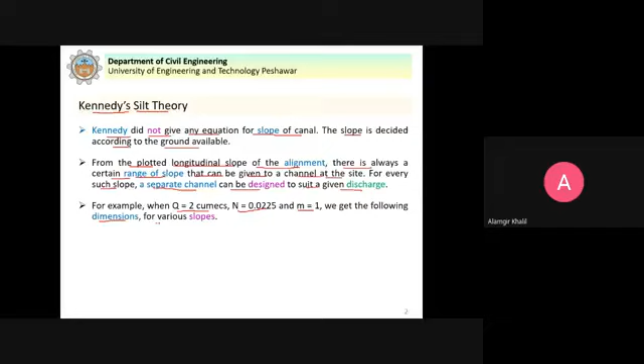For example, if we consider a discharge of 2 cubic meters per second, with this rugosity coefficient and this critical velocity ratio, we get different dimensions for various slopes. You can see in this table, if we design the channel according to Kennedy's theory, assuming the slope is 1 in 5,000, we get these values for the bottom width of the channel and the depth of flow. We have this as the trapezoidal channel.

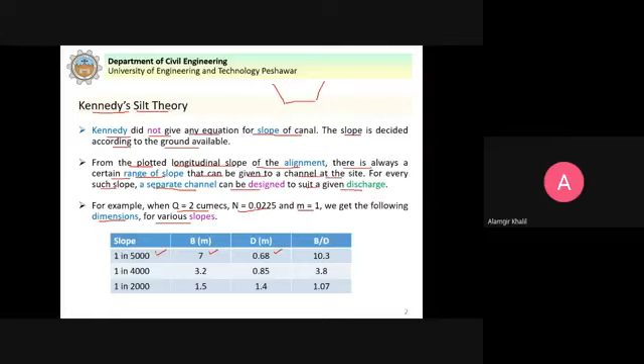So this is the bottom width, this is B, and this is the depth of flow, the full supply depth. So the B by D ratio is 10.3.

If we consider the slope as 1 in 4,000, then these are the values. You can see here that for every such slope, a separate channel can be designed for a given discharge. The discharge is the same, 2 cubic meters per second, and you can see we get these dimensions, so the B by D ratio is then 3.8.

And if we consider the longitudinal slope as 1 in 2000, then the bottom width is 1.5 and the depth of flow is 1.4, giving a B by D ratio of 1.07. So it means that when we consider a different longitudinal slope, we get different dimensions for the channel cross section for that given discharge.

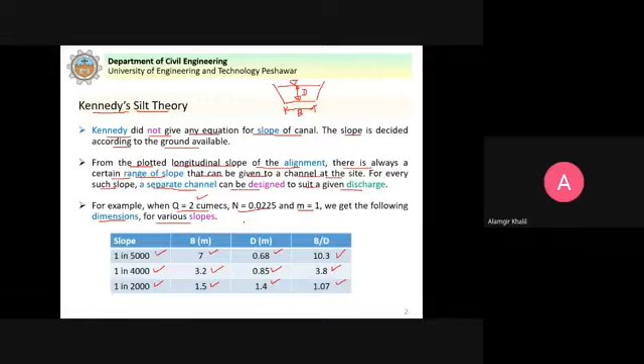Now the question is, which channel section will best suit the given situation? This is one of the drawbacks in Kennedy's silt theory, because Kennedy did not give any clue as to which one would be the best. Unfortunately, Kennedy's theory provides no clue to which of the channels will be best suited for a particular discharge and type of soil. Hence, some guidance is necessary to find out which channel would suit the need best.

To provide this guidance, suitable B by D ratios were fixed in various irrigation departments on the basis of experience. So to provide guidance on which channel section would be best for the given situation, for the given discharge and type of soil, suitable B by D ratios were fixed from experience.

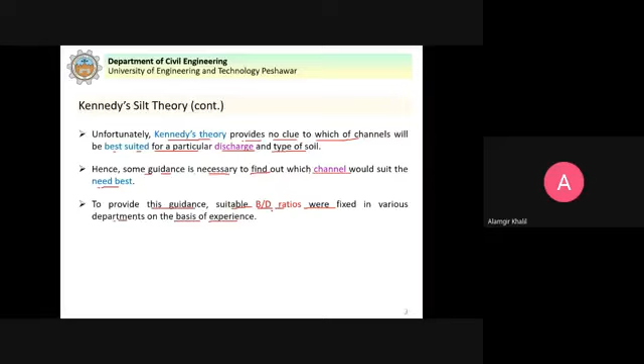Wood's normal design table, available in the book Irrigation and Water Power Engineering by Punmia, is one such criteria which was prepared in Punjab and is very much in use. Thus, if the B by D ratio is selected from the recommended values, one more equation is available, and a unique design of a channel can be done, including bed slope, using Kennedy's theory.

So what happened is, if you remember in the previous lecture, we solved a problem. If you change the slope, we get different dimensions of the channel section, so the solution is not unique.

If we fix this B by D ratio, we can have a unique design, meaning there will be one design of the channel. We will come up with the depth and the bottom width of the trapezoidal channel, including the bed slope, the longitudinal slope of the channel, using Kennedy's theory.

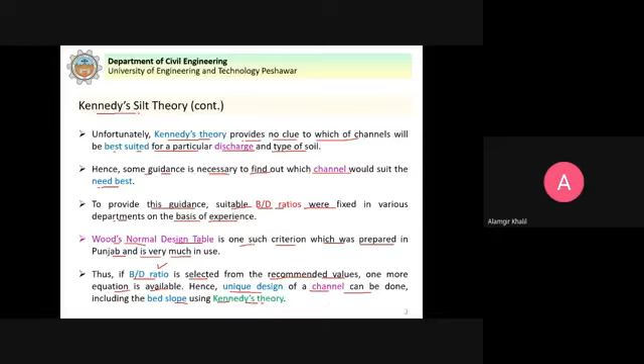This was an improvement on Kennedy's silt theory, so that's why we discuss case 2. Now for case 2, the discharge, rugosity coefficient, the critical velocity ratio, and B by D ratio are given.

So how do we proceed to design the channel? Again, we have a step-by-step procedure. Step number 1 is to calculate A in terms of D. Since the B by D ratio is given, let B by D equal X, where X is some given value. So B will be equal to D times X.

Now this is the area for a trapezoidal channel section. A is equal to B times D plus Z, where Z is the slope, into D square. Now if we consider the side slope is half to 1, this is Z here, as we already discussed.

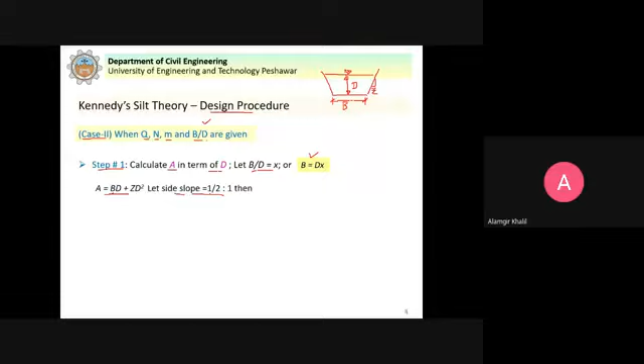So this is the depth, the full supply depth for the design discharge, and this is the bottom width of the channel section, and we have the side slope, so this is Z. Let the side slope be equal to half ratio 1.

Then this equation can be written as for area. Now we replace this B in this equation for area. So this will then be equal to D square into X plus 0.5.

Step number 2: the value of V is known in terms of D by Kennedy's equation. So this is the equation, this is the critical velocity that we calculate from Kennedy's equation. You can see here that in this equation, the values of V and A

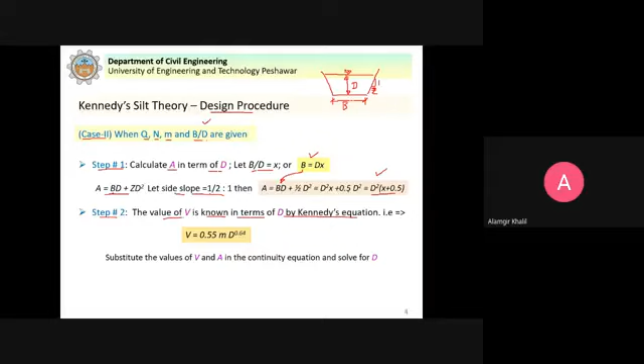should be substituted in the continuity equation. We have this as the area, and we have this as the velocity, for the equation that we can put in the continuity equation: Q is equal to A into V. So A is coming from here and V is coming from here. When you simplify this equation, you can see that the only unknown is D.

Because discharge is given, the critical velocity ratio is given, X is given, this is the B by D ratio. So the only unknown is the depth of the flow section, so that can be determined.

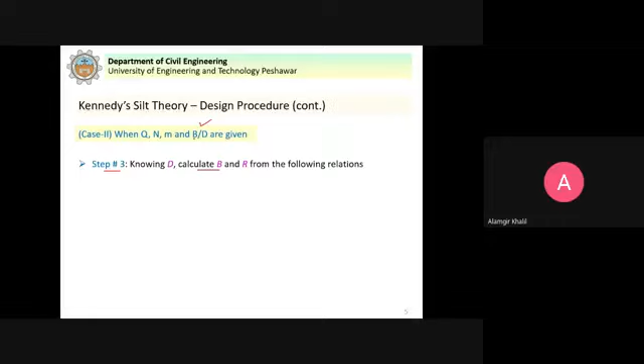Now, when depth can be determined, step number 3 is we can calculate B, because the B by D ratio is given and depth is now known, we can calculate the bottom width. Once B and D are known, we can calculate the hydraulic radius or hydraulic mean depth.

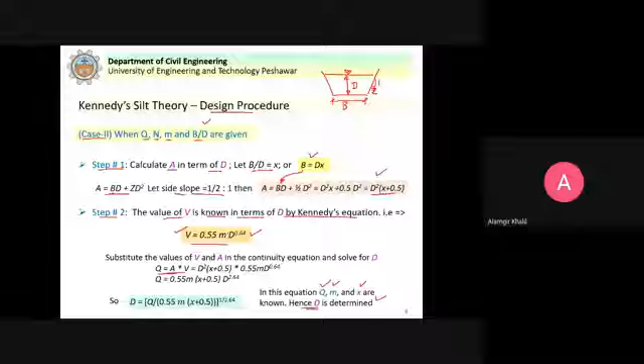Step number 4 is that in Kennedy's equation, the critical velocity can be calculated, now that depth is known, so we can calculate the velocity from Kennedy's equation, using the critical velocity ratio M that is given. Clear?

Now step number 5 is that knowing velocity and the hydraulic radius, we can determine the longitudinal slope of the channel using the Chezy and Kutter equations. So this is the Chezy equation: V is equal to C into square root of hydraulic radius and longitudinal slope.

So this is the Kutter equation. This value of C comes from the Kutter equation, and we have square root of RS in the MKS system. In the FPS system, the equation we already discussed in the previous lecture.

So in this equation, everything is known: this velocity is known, the rugosity coefficient is given, and the hydraulic radius we have calculated. So the only unknown is the longitudinal slope, this S. Now this S is present in both the numerator and the denominator, so this equation can be solved by trial and error.

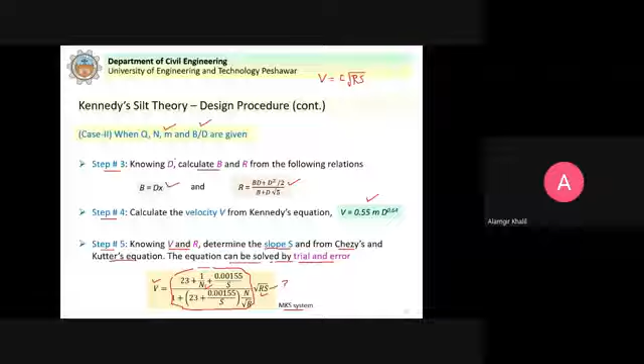So these are the design steps that we have to follow in case 2. Now let us try to solve an example.

Design an irrigation canal with the following data by Kennedy's theory: the discharge is 14 cubic meter per second, the rugosity coefficient is 0.0225, the critical velocity ratio is 1, and the B by D ratio given is 5.7. Let us try to follow these steps and solve this problem.

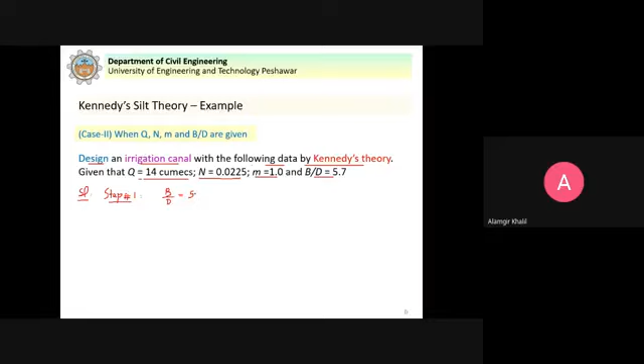So step number 1, following our step-by-step procedure, we have to write down the equation for the area. The channel we consider is the trapezoidal channel section. As the B by D ratio is given, that is 5.7, this can be written as B equal 5.7 times D.

Now we have the equation for the area A. This is the general formula for a trapezoidal channel section: B times D plus Z, which is the side slope, into D square.

Now for side slope, Z ratio 1, we consider half to 1. Then this equation for area A becomes B into D plus D square by 2.

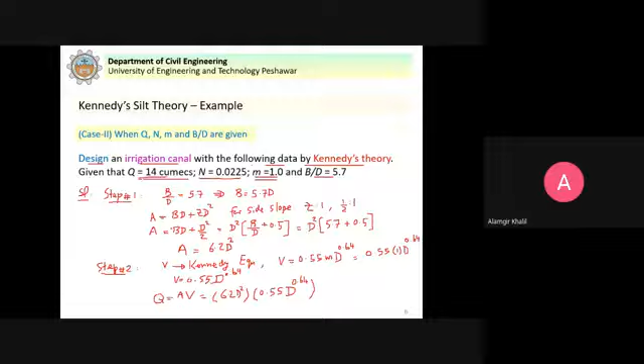Now in this equation you see discharge is given as 14 cumecs, so the only unknown is D. So D we can calculate from here. D, this will be equal to the discharge divided by 6.2 into 0.55, and power here we have 2 and 0.64, so 2.64 comes on the other side. So this will be 1 divided by 2.64.

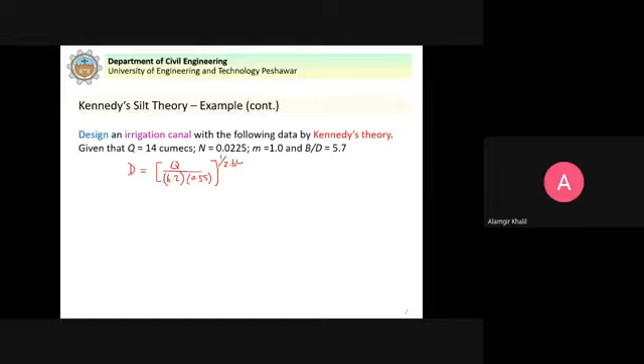So now just plug in the values. So we will get D that is equal to 1.71 meter. Once D is known, then we can go to step number 3.

And now B by D ratio is given, we can calculate B. So this is 5.7. So this will be equal to 5.7 into D. Now just put the value of D as 1.71, so this comes out to be 9.75 meter.

Similarly, we can calculate the hydraulic radius. So the hydraulic radius, that is equal to flow area divided by the wetted perimeter. So this will be equal to B times D plus D square by 2 for the given side slopes, and the wetted perimeter will be equal to the bottom width plus D into square root of 5. So if you plug in the values for B and D, we will get this is 1.34 meter.

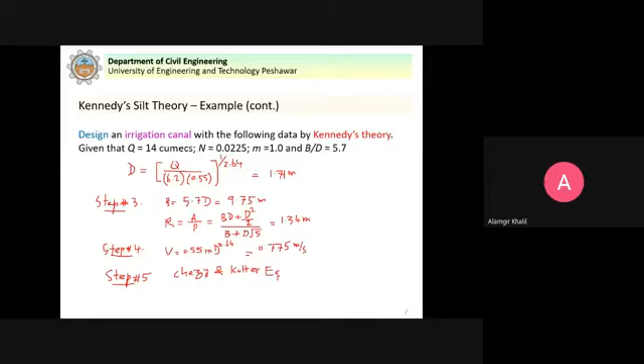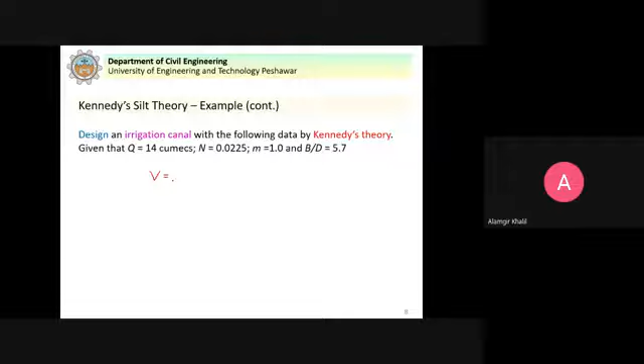Chezy and Kutter equations. So that equation is that V is equal to, take care of the system of units, 23 plus 1 divided by n, rugosity coefficient, plus we have 0.00155 divided by S, all divided by 1 plus 23 plus 0.00155 divided by S, into n, rugosity coefficient, into square root of R, and this whole multiplied by square root of RS.

Now in this equation you can see that we have S here, we have S here, the longitudinal slope, and we have S here. So V is known, everything is known, hydraulic radius is calculated, rugosity coefficient is given here, you can see. So the only unknown is S. Now S is present in the numerator and in the denominator, so solving by trial and error.

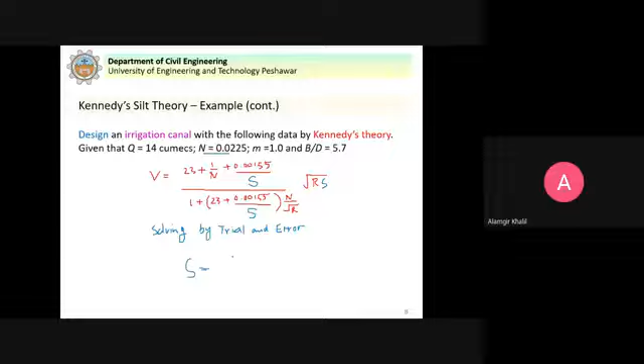Solving by trial and error, so we will get the value for this slope of the channel equal to 1 in 4940.

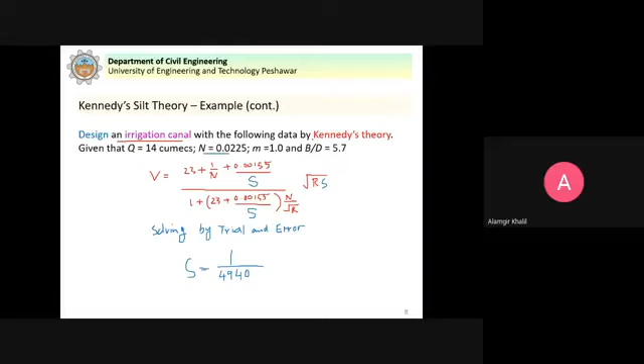So this is how we proceed to design the irrigation canal using the Kennedy's theory when B by D ratio is given. So you can see here the advantage of this B by D ratio, that we have unique design, and also you see that we get the value for the longitudinal slope of the channel. Clear?

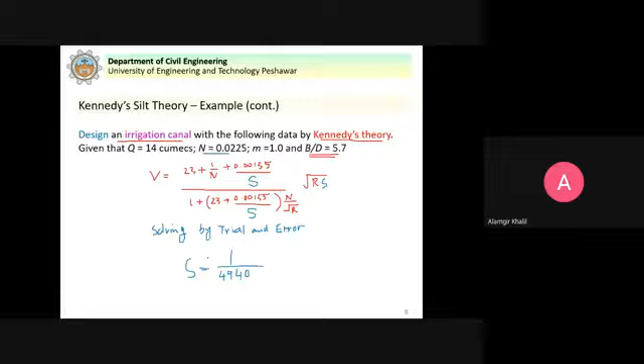Next we discuss drawbacks in Kennedy's theory. Kennedy did not realize the importance of B by D ratio, as we already discussed in detail. Similarly, he did not define the silt grade, the size, and the silt charge, the quantity of silt load. He did not give any relation between velocity of flow and water surface slope.

Empirical relations between velocity, depth, hydraulic radius, and slopes were found to determine a stable cross section.

So what is the drawback of empirical relations? You develop empirical equations from a set of data, and these equations fit only that data. It means that under other conditions, these equations may not be applicable or may not give satisfactory results. So this is normally the problem with empirical equations, that their application is limited to similar cases only, not all cases.

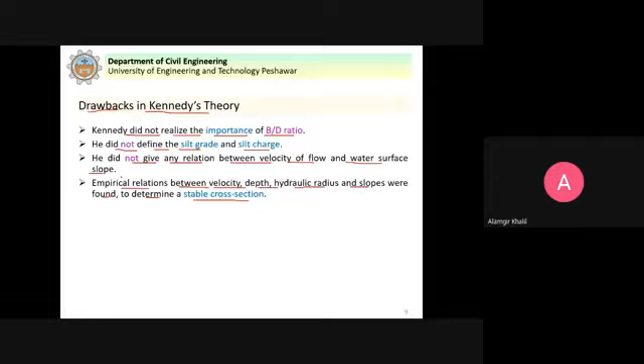Kennedy did not give any relation for the calculation of bed slope of the canal. The bed slope could be adopted as per the ground conditions. Similarly, he did not account for silt concentration and bed load separately; he accounted for all factors in one single factor, that is M, the critical velocity ratio.

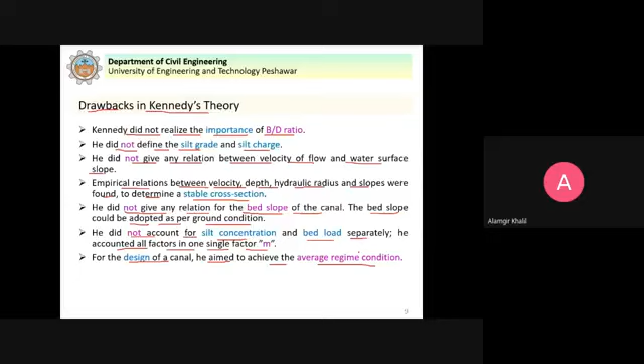For the design of a canal, he aimed to achieve the average regime conditions, and for the determination of mean velocity of flow, he used Kutter's equation. Thus, the limitations of Kutter's equation were incorporated in his theory also. So these are the drawbacks in Kennedy's theory.

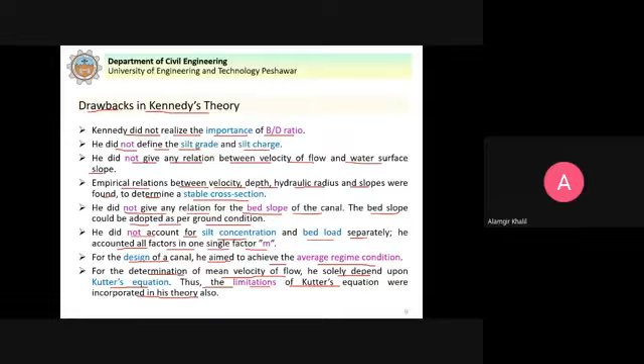So next we discuss Lacey's regime theory. Lacey, an eminent civil engineer of the United Provinces Irrigation Department, published his first paper through the Institution of Civil Engineers, London, in 1929. He carried out extensive investigations on the design of stable channels in alluvium, and on the basis of his research work, he found many drawbacks in Kennedy's theory.

It was stated by Kennedy that a channel is said to be in the state of regime, that is a stable channel, if there is neither silting nor scouring in the channel. If there is no silting and no scouring, the channel is stable, and that is the state of regime. But according to Lacey, even though a channel with no silting and no scouring may actually not be in regime.

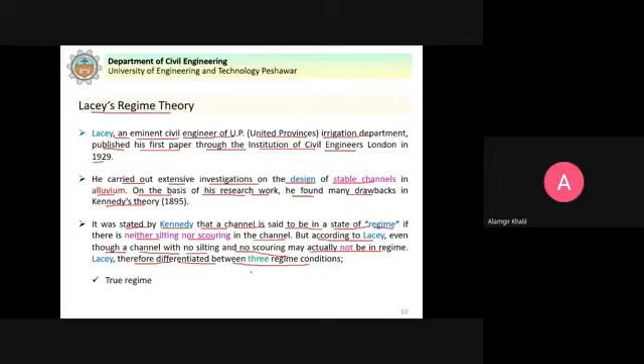So Lacey therefore differentiated between three regime conditions: true regime, initial regime, and final regime. So what are regime conditions? A channel is said to be in regime when the following conditions are satisfied.

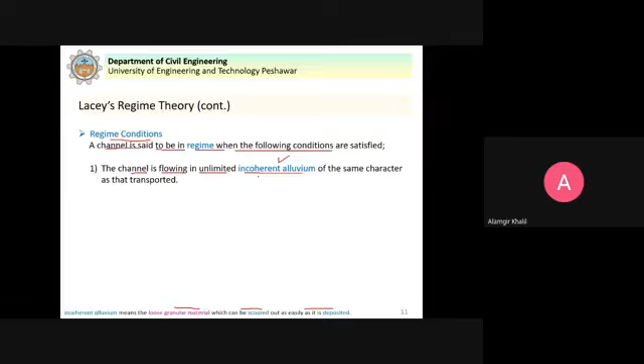Number one, the channel is flowing in an unlimited incoherent alluvium. So what is meant by incoherent alluvium? It is a loose granular material which can be scoured out as easily as it is deposited. That is known as incoherent alluvium. So the channel is flowing - this is a requirement for the regime condition - that the channel is flowing in unlimited incoherent alluvium of the same character as that transported.

Discharge is constant, silt charge is constant, that is the amount of silt is constant, silt grade is constant, that is the size, and the flow is uniform flow. Hence, a designed channel is said to be in true regime if the above conditions are satisfied. So if these conditions are satisfied, then we say that the design channel is in true regime.

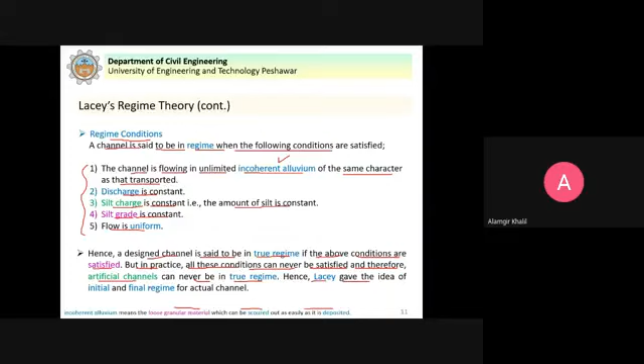But in practice, all these conditions can never be satisfied, and therefore artificial channels that we design can never be in true regime. Hence, Lacey gave the idea of initial and final regime for actual channels.

So what is initial regime? One of the conditions of attaining regime of a channel is that there should be freedom for the channel to form its own section. Initial regime is the state of a channel that has formed its cross section only and yet not secured the longitudinal slope.

This is initial regime. So what do we mean by initial regime? The bed slope of the channel varies - it has yet not secured the longitudinal slope. If a channel is constructed with a defective slope, what will happen? Naturally, given the channel and flow conditions, it will try to establish a longitudinal slope that is appropriate, because this is an unlined channel.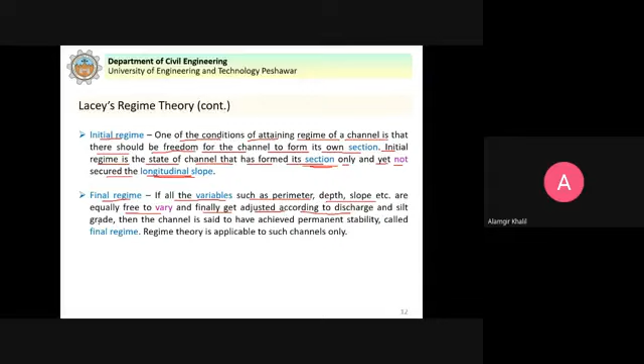The final regime: if all the variables such as perimeter, depth, slope, etc. are equally free to vary and finally get adjusted according to discharge and silt grade, then the channel is said to have achieved permanent stability, called final regime. This is the final regime - if all the variables are equally free to vary and achieve permanent stability, this is known as final regime. Regime theory is applicable to such channels only.

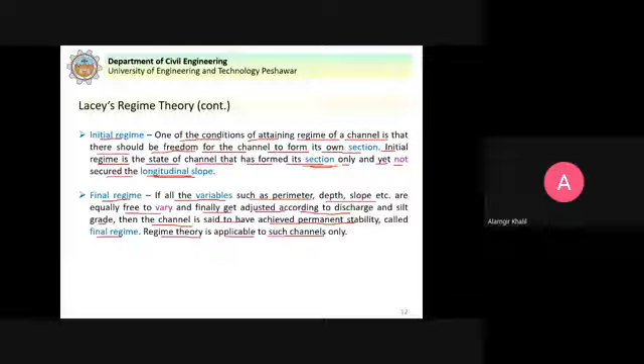We continue with this discussion. Such a channel in which all variables are equally free to vary has a tendency to assume a semi-elliptical section. This is according to this theory, this is what this theory says.

So you can see here the channel shape carrying coarse silt. It will have shallow depth and wide section. You can see here the section is wide and the depth is shallow. This is the channel shape carrying coarse silt.

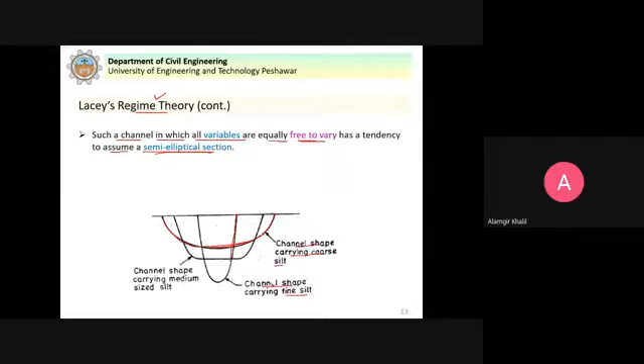If the channel carries fine silt, this will be the channel shape. It will be narrower in width and it will be deeper, narrower width and more depth. This is how the channel will assume these shapes, according to this theory.

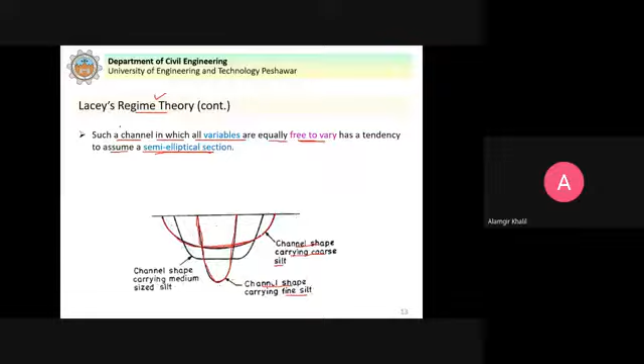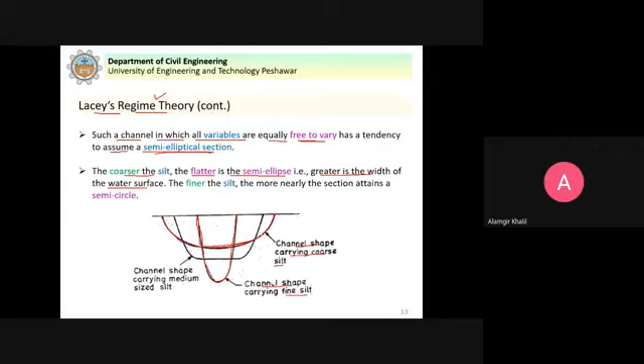So the coarser the silt, the flatter is the semi-ellipse, that is, greater is the width of the water surface. As I already explained, the finer the silt, the more nearly the section attains a semicircle.

The second point which Lacey argued was that the sediment is kept in suspension not only by the vertical component of the eddies which are generated on the channel bed, but also by the eddies generated on the sides of the channel.

If you remember, we discussed in Kennedy's theory that water is flowing in an unlined channel, so because the water is flowing there will be friction, and because of the friction these eddies are generated. Kennedy argued that the eddies generated from the bed of the channel, for most part, keep the sediments, the silt, in suspension, and do not allow silting to happen in the channel.

He stated that we can have eddies from the sides of the channel, but for most part they are horizontal and have very little effect on the silt in suspension.

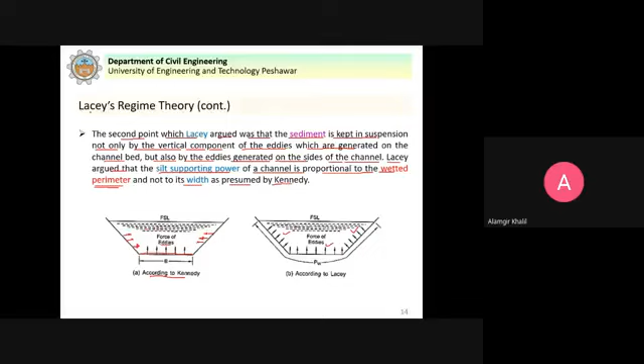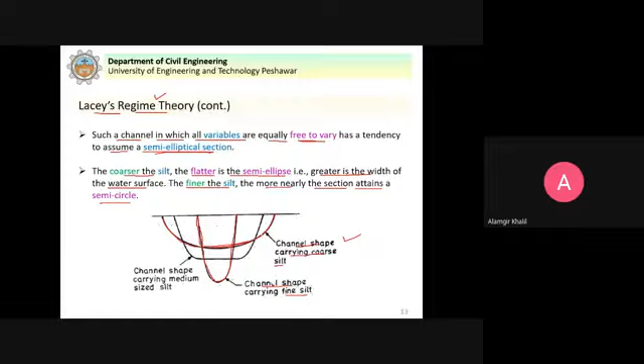However, Lacey argued that the silt supporting power of the channel is proportional to the wetted perimeter and not to its width as presumed by Kennedy. As per the Lacey regime theory, this makes sense. You see here that this is the shape of the channel for coarse silt, and this is the shape of the channel for fine silt. You can see here that the wetted perimeter varies, so this makes sense with what he said.

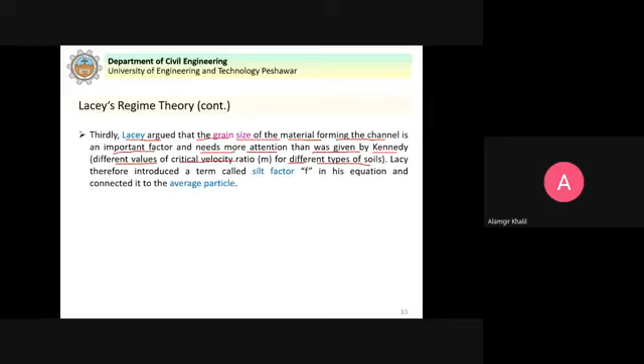Thirdly, Lacey argued that the grain size of the material forming the channel is an important factor and needs more attention than was given by Kennedy, because he brings everything into the critical velocity ratio, with different values of critical velocity ratio for different types of soils. So Lacey therefore introduced a term known as the silt factor in his equation and connected it to the average particle size, and he defined this silt factor.

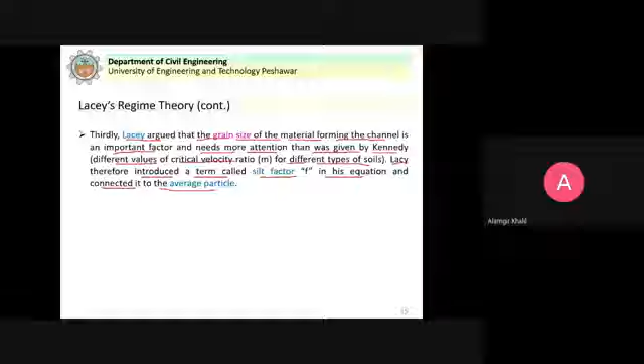Now, permanent regime: a channel is in permanent regime when its section is provided with a lining to protect against scouring action, thereby imparting permanency to the channel section and longitudinal slope.

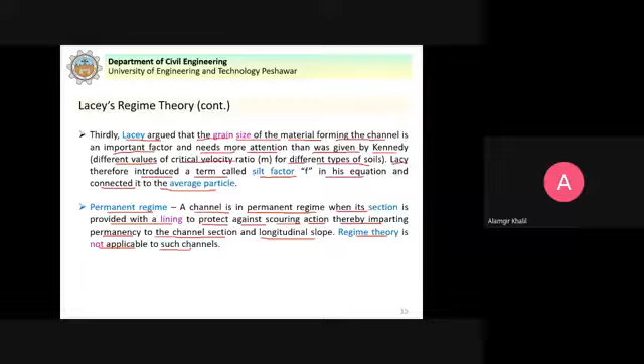So regime theory is not applicable to such channels. That's why the Kennedy and the Lacey theory are not applied to the design of lined canals; these are for the design of unlined canals.

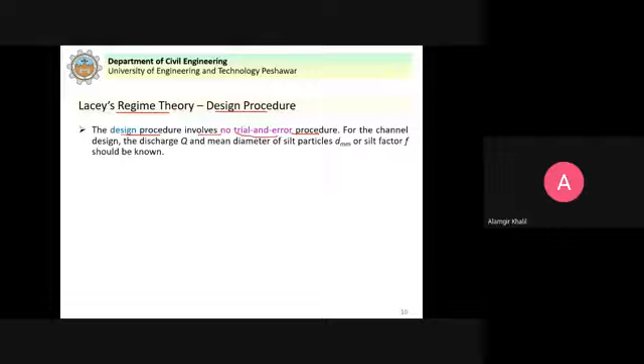So the design procedure for Lacey's regime theory involves no trial and error. For the channel design, the discharge and the mean diameter of the silt particles, d sub mm, in millimeters, or the silt factor should be known.

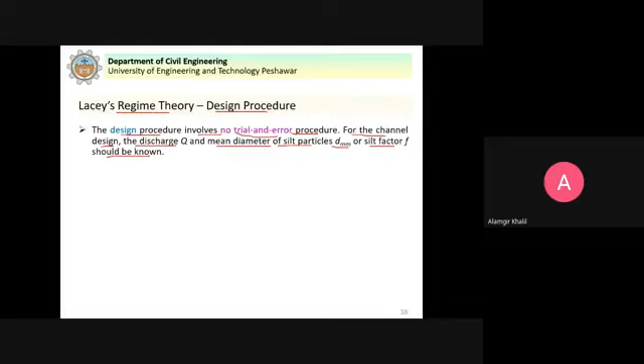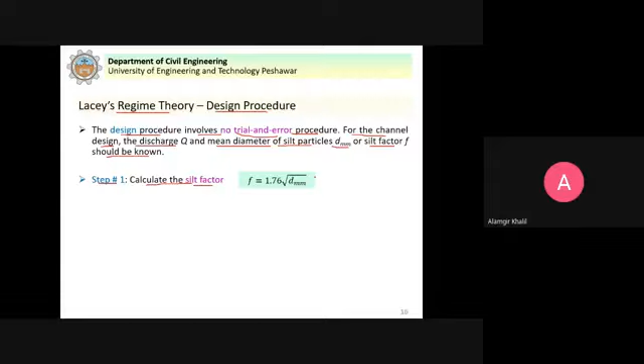So step number 1 is to calculate the silt factor. Kennedy defined the critical velocity ratio, but in case of Lacey's theory, he gave the silt factor using this equation, where either the silt factor is directly given or it can be calculated using this equation, where d mm is the mean particle size in millimeters.

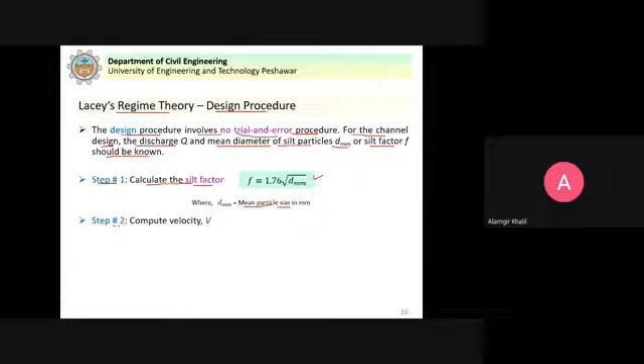Step number 5 is to find out the bed width and the depth d of the channel section. Since area and wetted perimeter are known, the side slope of the canal can be considered as usually half to 1.

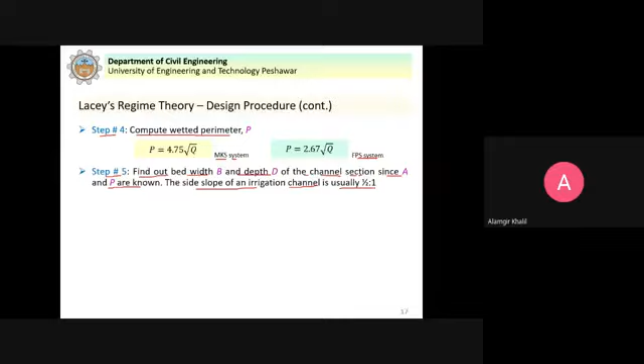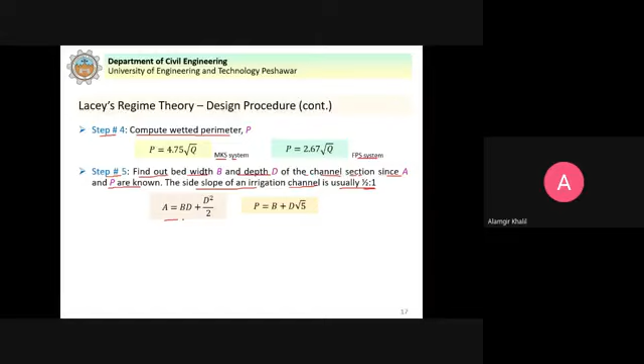So we have these equations for a trapezoidal channel. If the side slopes are half to 1, these are now the equations. In this equation you can see the wetted perimeter is known and the area is known.

So we have unknowns as B, the bottom width, and the depth. We have two equations, and these two equations can be solved in terms of the two unknowns.

We can use these equations to calculate the values. D will be equal to this, using area A, and for B, when D is known, it can be calculated using this equation. This is actually a simplification of this equation. Square root of 5 is 2.236.

Step number 6 is to calculate the hydraulic radius. Again, Lacey gives the equation. For the hydraulic radius, this equation applies in the MKS system and this one in the FPS system.

We calculate hydraulic radius from here. Now, hydraulic radius can also be calculated as area divided by the wetted perimeter, and since the area and wetted perimeter are already calculated, R can also be calculated from this equation: area divided by the wetted perimeter.

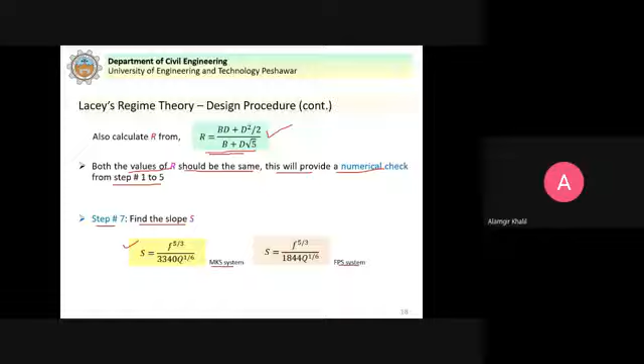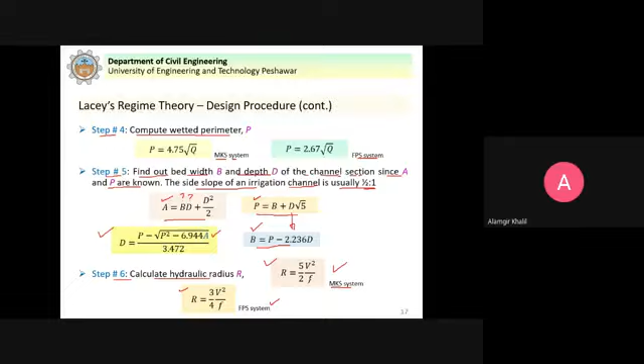Now these equations for the slope involve the silt factor. The hydraulic radius equation involves the velocity and the silt factor. Similarly, the wetted perimeter equation, and we have the velocity equation here, involve the discharge and the silt factor.

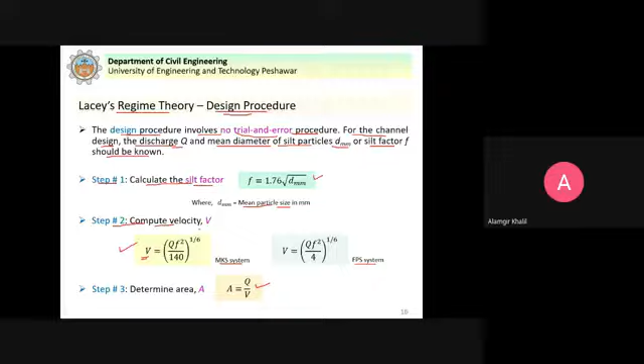These equations can be developed, and for the development of these equations you can read the textbook on irrigation. But here there's no need to discuss how these equations are developed. Now in these equations you see that the silt factor is present.

So if the silt factor is not constant, you see that this is the drawback of Lacey's regime theory. Anyway,

This is now a table which gives the values of particle size for various types of alluvial materials. Alluvium, remember, is anything that is transported by the water. This table is from the textbook by Garg.

You can see here for silt, very fine, this is the type of material soil. Then D sub mm means the average grain size in millimeters: 0.05 to 0.08. If we have fine silt, 0.12, medium 0.16, standard that is 0.32, for which the silt factor is 1.

Similarly, we have sand, medium 0.51, coarse sand 0.73, and other types of materials. So if in a question these materials are given, you can use this table to pick the average grain size and then put it in the equation to calculate the silt factor.

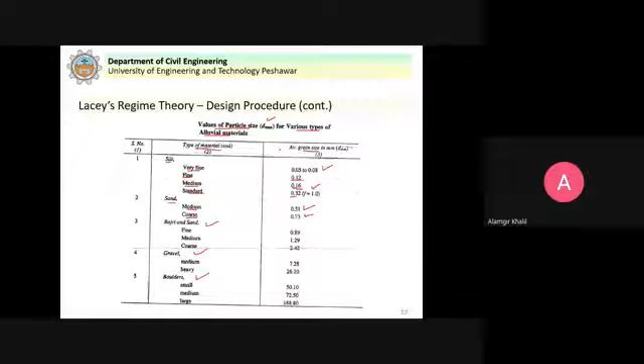Now let us discuss an example to design an unlined channel as per Lacey's theory for the given data: the discharge is 30 cubic meters per second, the mean diameter of silt particle is 0.33 millimeter, and the side slopes can be assumed as half to 1.

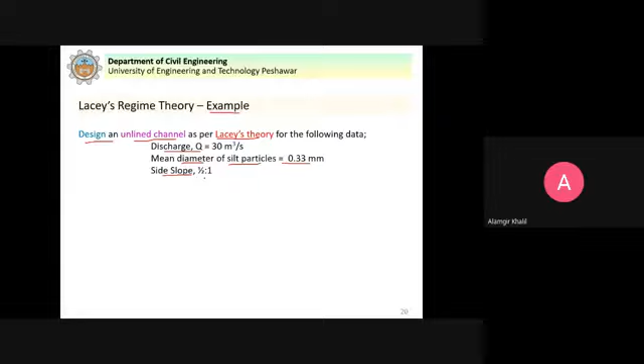So let us solve this. We design this unlined channel using Lacey's theory. Step number 1 is we have to calculate the silt factor. If the silt factor is directly given, we can just use that value.

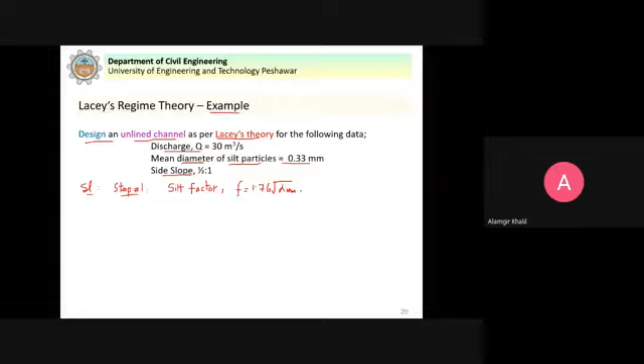So the silt factor F is equal to 1.76 into square root of d sub mm. Put this value here, and F will be equal to 1.0 something, so 1.

Next, step number 2 is we calculate the velocity. Lacey gave his own equations to calculate these parameters. So velocity V is equal to discharge Q times F squared, divided by 140, taking care of the system of units, the whole raised to power 1 by 6.

Now you can see the silt factor and discharge are known, so plug in the values and we get V equal to 0.773 meter per second.

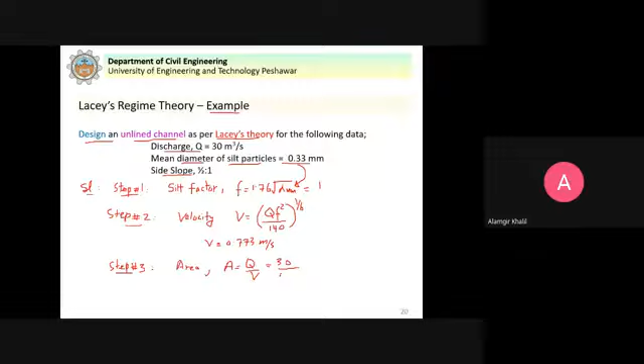That is equal to discharge divided by the velocity. Now discharge is given, that is 30. And the velocity we have calculated in step number 2, 0.773. So the area, that is equal to 38.81 square meter.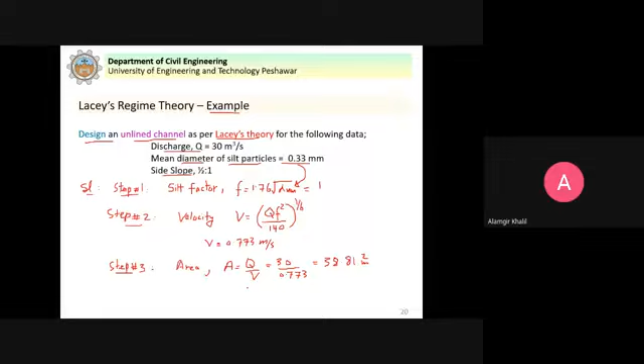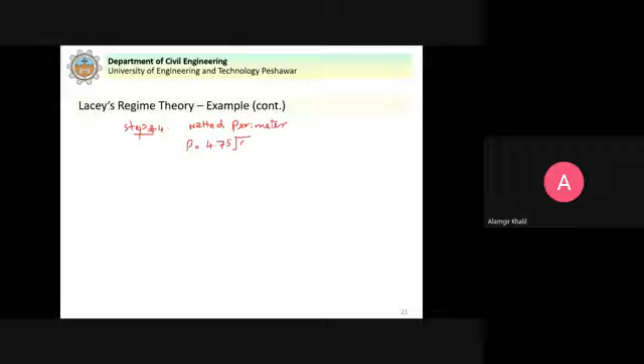Now the area is calculated. So step number 4 is the wetted perimeter we can calculate. So for that we have the equation P is equal to 4.75 into square root of the discharge. So put the value, this comes out to be 26.02 meter.

26.02 meter. Now that the area and the wetted perimeter are known, step number 5 is to calculate the bottom width and depth of the channel.

So we have the equation, D is equal to P minus square root of P square minus 6.944 times A (the area), divided by 3.472.

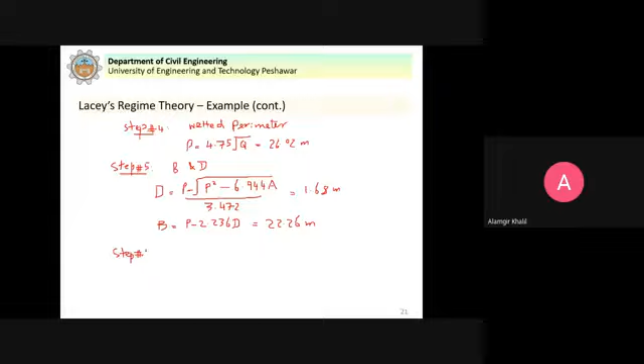Next we calculate the hydraulic radius, step number 6. We calculate R. Now R will be equal to 5 by 2, for MKS system of units, into V square by F. Now everything is known, so we calculate hydraulic radius is 1.49 meter.

Now as a check, we can also calculate R from the equation. This is as a check on the calculations. So this R can also be calculated from area divided by the wetted perimeter. So this is equal to B times D for trapezoidal channel section plus D square by 2 for the given side slopes, divided by B plus D into square root of 5.

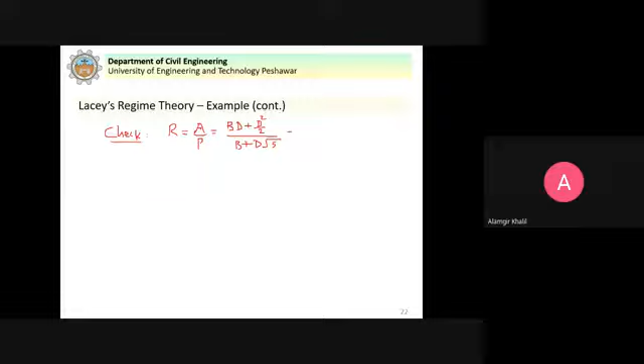So put the values, this comes out to be 1.49, and here it is also 1.49 meter. So this is a check.

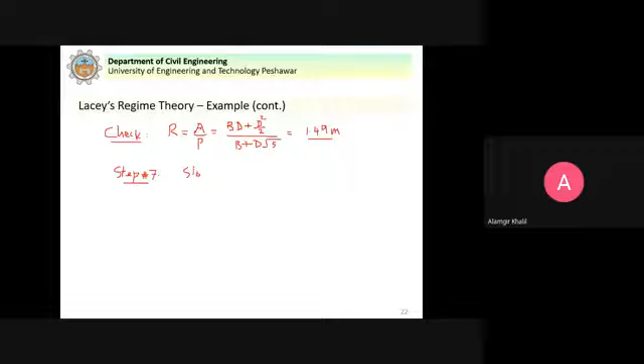And step number 7 is to calculate the longitudinal slope, S. Again, Lacey gives his own equation for the slope S, and S is equal to F power 5 by 3 divided by 3340 into Q power 1 by 6.

So just put the values. This S comes out to be 1 in 5900. So this is the longitudinal slope of the channel.

Next, we discuss the drawbacks in the Lacey's regime theory. The concept of true regime is only theoretical and cannot be achieved practically. The various equations derived by considering the silt factor, as I already explained, the silt factor present in the various equations is not at all constant.

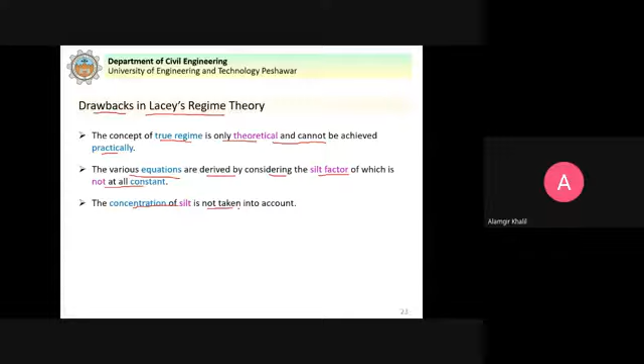The concentration of silt is not taken into account. The silt grade, the sizes, and the silt charge, the load quantity, are not clearly defined. Again, the equations are empirical and based on available data from a particular type of channel. The characteristics of regime of channel may not be the same for all cases.

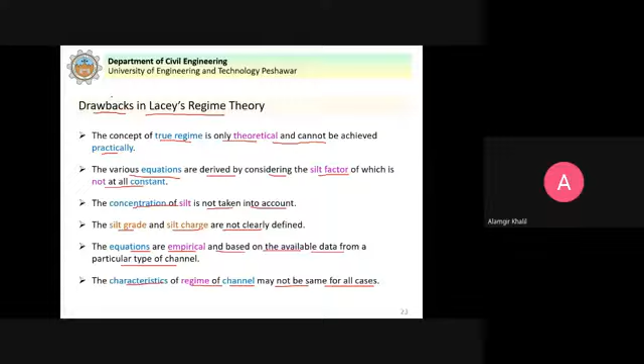So these are the drawbacks in the Lacey's regime theory. But no doubt, as compared to Kennedy's theory, this became the popular theory in the subcontinent, and many irrigation canals were designed based on the Lacey's regime theory.

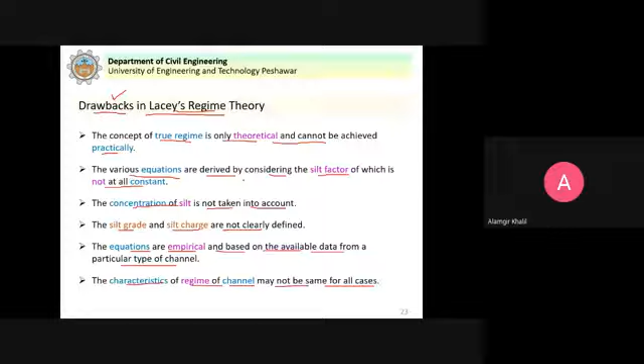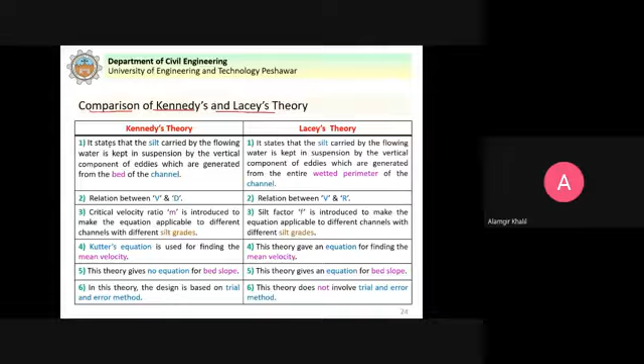Comparison of Kennedy's and Lacey's theory. Kennedy's theory states that the silt carried by the flowing water is kept in suspension by the vertical components of eddies which are generated from the bed of the channel. Lacey's theory states that the silt carried by the flowing water is kept in suspension by the vertical component of eddies which are generated from the entire wetted perimeter of the channel. So here it's the bed, and here it's the entire wetted perimeter.

Kennedy gives the relation between V and D, if you remember the critical velocity equation. Lacey gives the relation between V and R. You can see here the velocity V equation, V and R.

Critical velocity ratio M is introduced to make the equation applicable to different channels with different silt grades in Kennedy's theory, whereas in Lacey's theory, a silt factor is introduced for the same purpose. Kutter's equation is used for finding the mean velocity, whereas Lacey's theory gave its own equation for calculating the mean velocity.

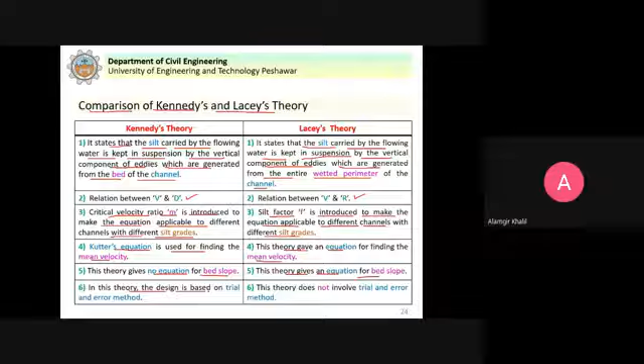Kennedy's theory gives no equation for the bed slope, whereas Lacey's theory gives an equation for the bed slope. Kennedy's theory design is based on trial and error, whereas in Lacey's theory it does not involve the trial and error procedure.